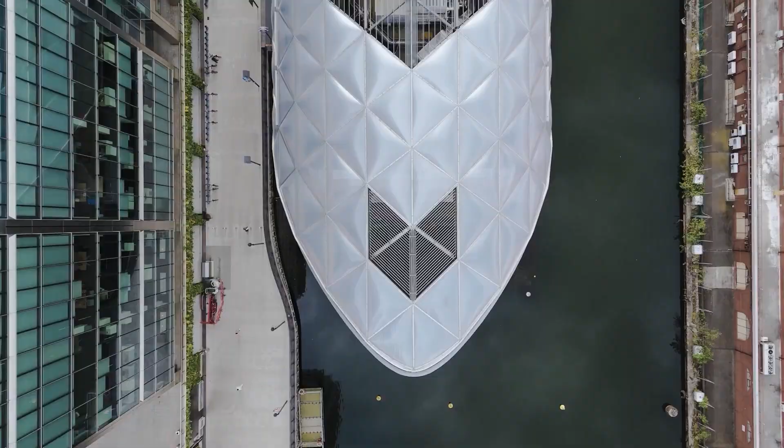Now, it's over budget and took much longer than planned. It will also only run 6 days a week. Back in May, the long-awaited and over-budget Elizabeth line opened.

That's terrible. Yeah, it's going to disrupt most of our commuting to and from London.

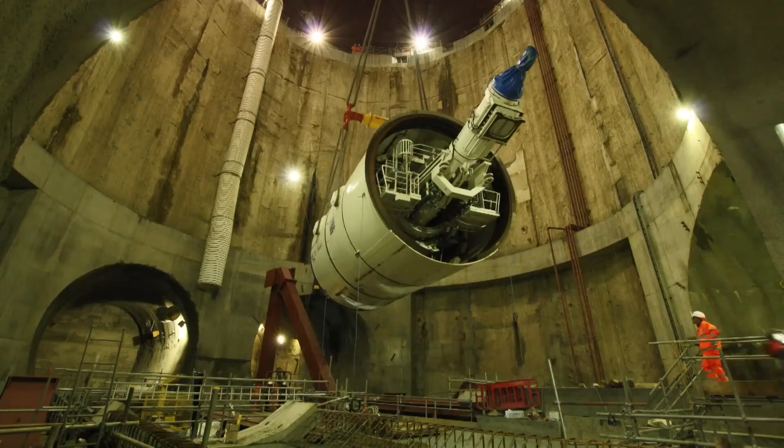The Elizabeth line was constructed using different advanced engineering techniques, including TBM, SCL, and segmented lining systems. Now a vital part of London's transport network, the Elizabeth line did not come into being without challenges. What began as an ambitious project to improve mobility for Londoners soon faced the harsh realities of building through a city shaped by centuries of growth.

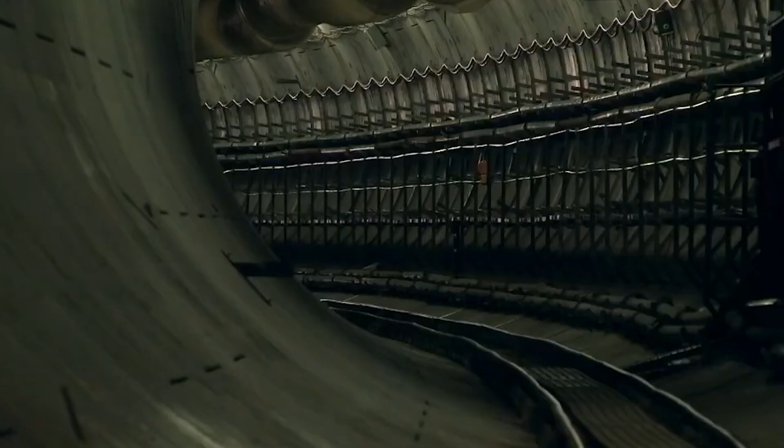Adding a new railway beneath one of the world's most congested underground and surface environments presented a host of complex obstacles. Today, we delve into the remarkable story behind its construction, uncovering the trials, breakthroughs, and critical moments that brought the Elizabeth line to life.

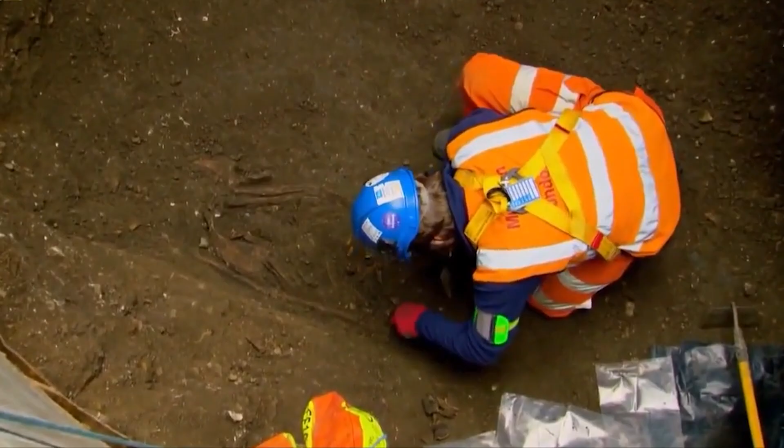A staggering 4-year delay. What exactly went wrong? The reasons are many, ranging from financial complications tied to contracts and executive salaries to unexpected incidents that arose during construction. First, the challenges of building in a dense urban environment.

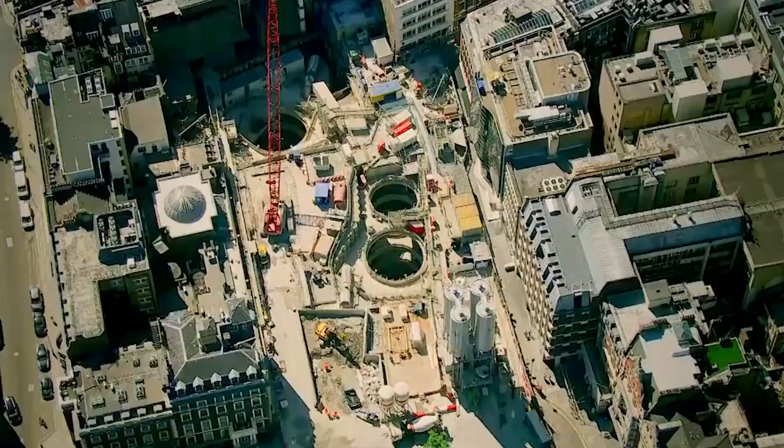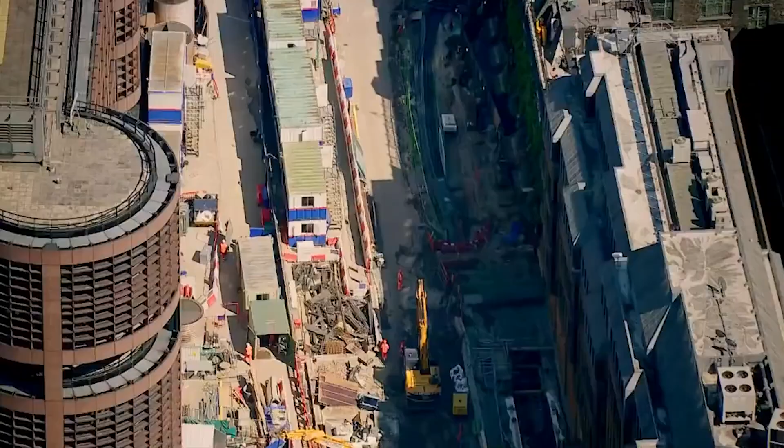Construction took place during the 2010s, a period when London had already reached a state of near saturation. Centuries of development had created a maze of infrastructure, existing underground lines, skyscrapers, sewage systems, all layered across both surface and subsurface. Navigating around these to safely carve out a new route proved to be a formidable task.

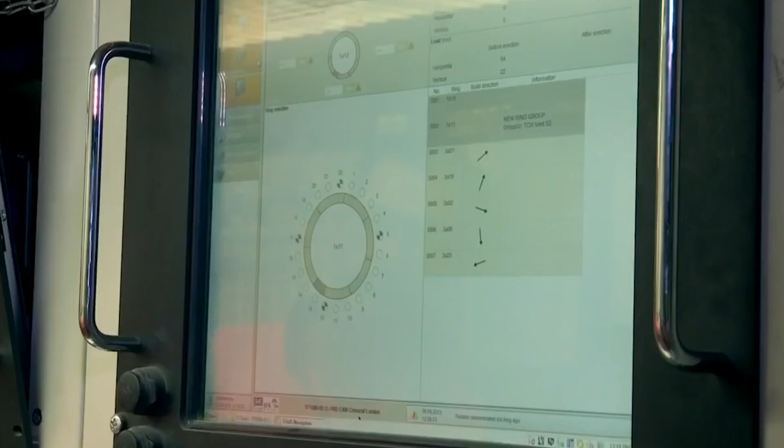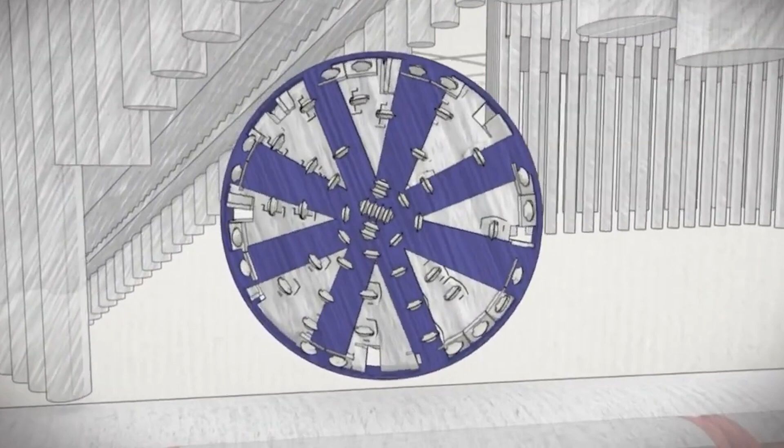TBM might seem like just a tool for digging, but in reality, it requires an incredibly precise path to be set. For instance, when digging near Tottenham Court Road Station, the TBM had to pass through a space just 35 cm away from the escalator's structural base. Additionally, it had to navigate only 85 cm away from an active tube line. In other words, the precision required was so high that it was as if the machine had to clear a path with the smallest of margins.

Structure. This is our TBM. Yep. This is the pile bottom. Wow, and that's what we got in between. It's unbelievable. That's how good we are.

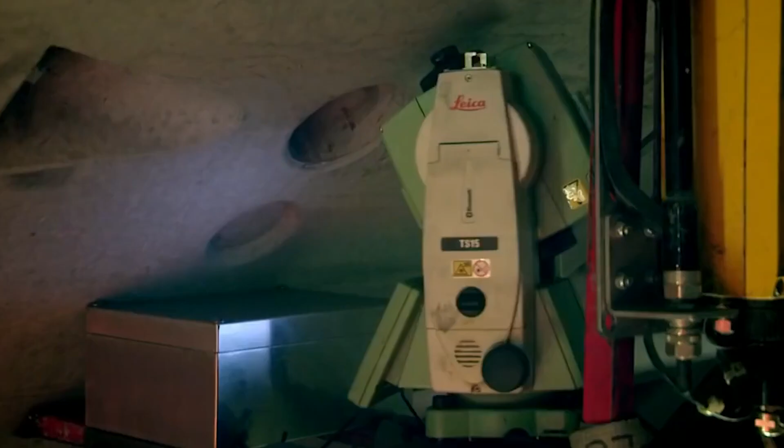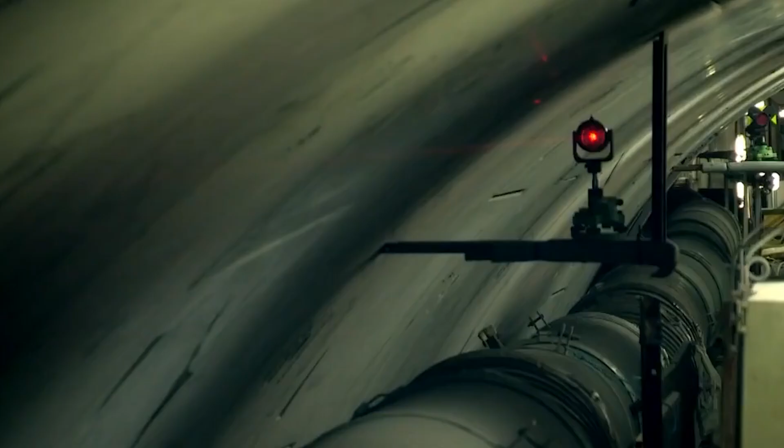Almost like threading a needle. In such tight spaces, the precise navigation of the TBM was made possible by the Tunis navigation system from VMT. Tunis is a highly accurate system capable of millimeter-level precision, continuously tracking the TBM's real-time position and correcting any deviations. Here is how it works.

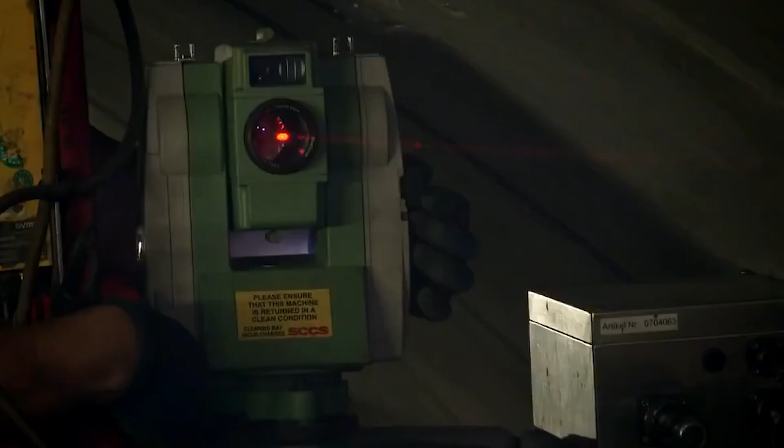A laser transmitter is set up near the tunnel's starting point. This transmitter sends a laser beam along a pre-designed reference line, guiding the TBM along its intended path. Inside the TBM, a target unit is installed to detect the laser beam emitted by the transmitter. This information is then continuously tracked by a total station, a precise measurement device which calculates the TBM's current position and direction.

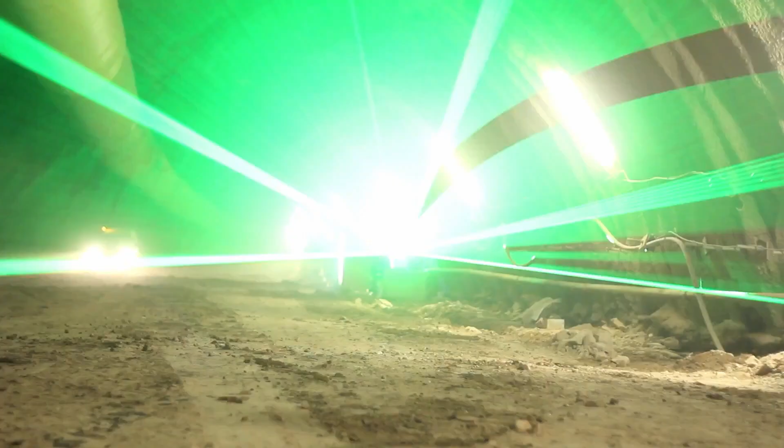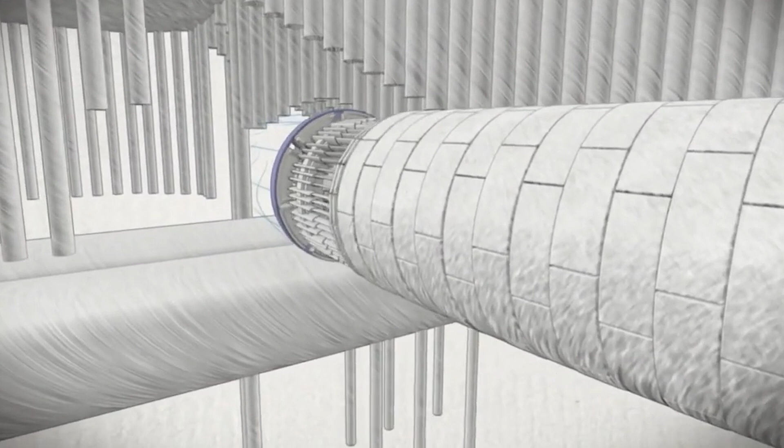In curved sections, relying solely on the laser transmitter becomes challenging for maintaining accuracy. To compensate, additional devices like reflectors and gyro sensors are used to correct the path. All of these processes are integrated into the Tunis software, enabling the TBM operator to make real-time adjustments to the machine's direction. As a result, thanks to the Tunis system, the TBM was able to safely complete its journey along the predetermined path, even through the complex and sensitive underground spaces of the city, without any collisions.

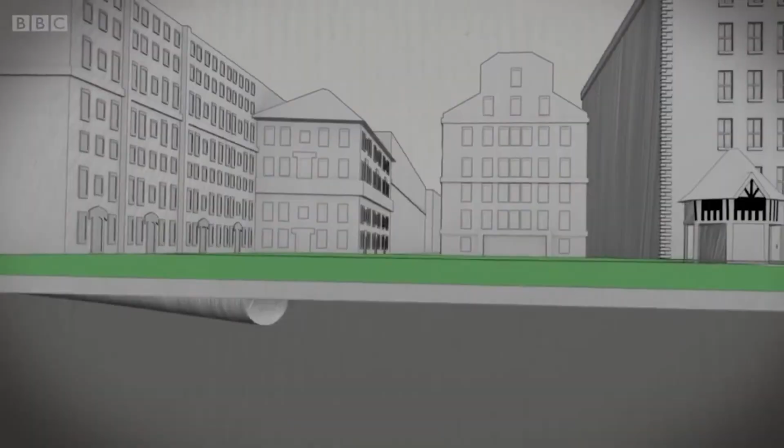This ensured that there were no incidents such as debris pouring out from beneath the TBM, which could have caused panic among passengers. Secondly, the ground subsidence problem occurred during the tunnel excavation process, which affected the stability of the surrounding buildings. Around 21 kilometers of underground tunnels were constructed for the Elizabeth line, cutting through the heart of central London. Given the dense concentration of buildings above ground, managing the risk of ground subsidence became a critical concern.

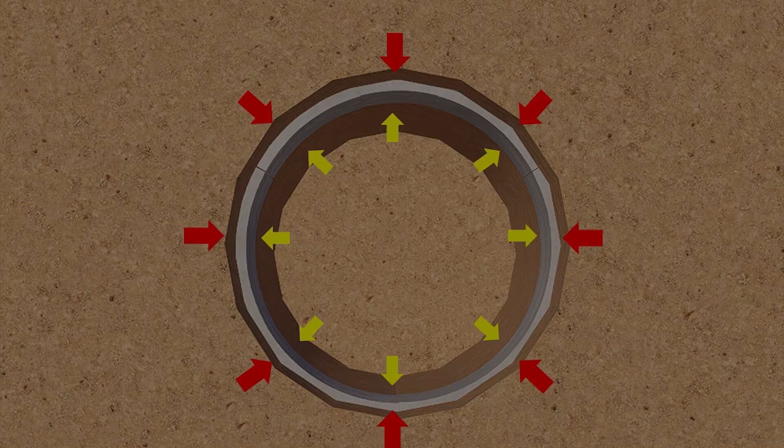When tunneling takes place, the surrounding ground loses its equilibrium, leading to ground deformation. In the case of TBM, the pressure at the tunnel face and the tunnel lining help support the ground, somewhat mitigating this deformation. However, in soft ground like London clay, it is impossible to avoid ground movement entirely, unlike in rock formations. This occurs because the removal of underground soil or rock causes the surroundings to lose their previous support, leading to deformation ahead of the excavation phase.

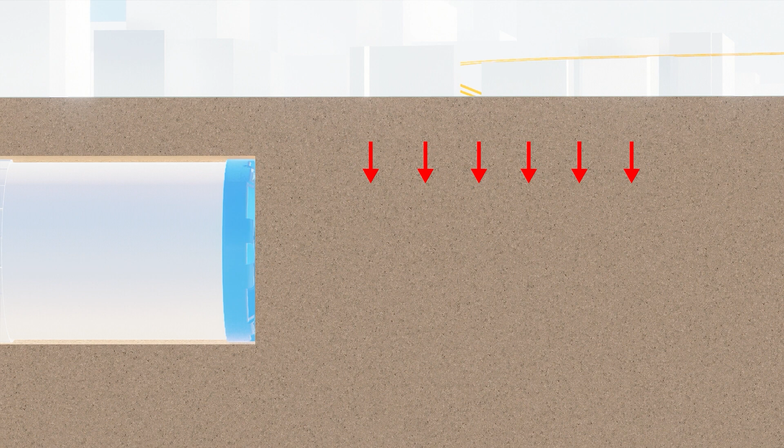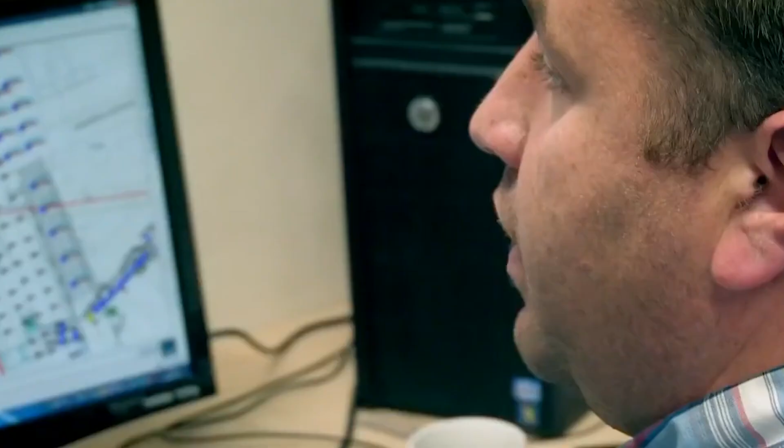Additionally, there is always a time gap between excavation and lining installation, during which further ground movement can take place. When subsidence occurs, there is a risk of damage to the buildings above. To mitigate this risk, extensive building damage assessments and monitoring were carried out.

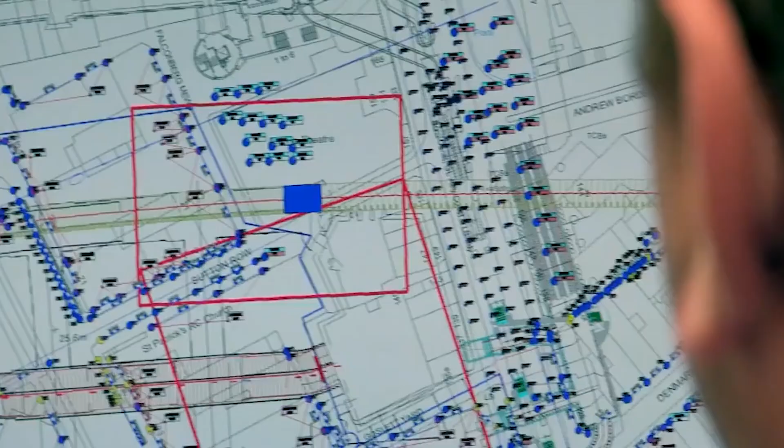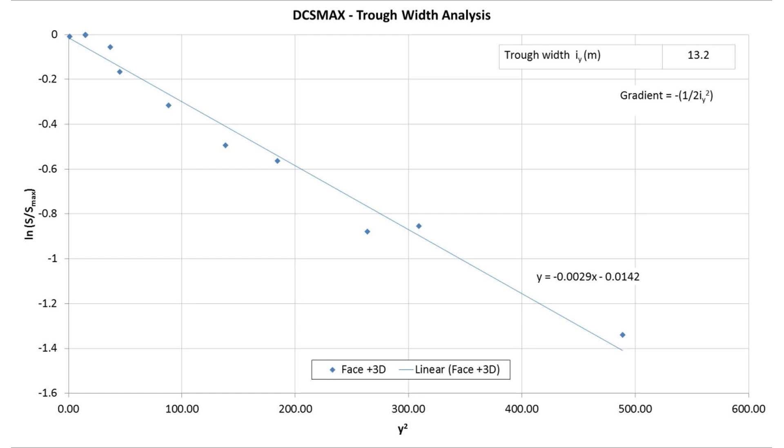Overall, the tunnel sections experienced minimal ground movement and the impact on buildings was negligible. This was consistent with the actual recorded results during construction. Especially in the western section between Paddington and Farringdon, which passes through the London clay, the volume loss was less than 0.5%, below the conservative damage threshold of 1%.

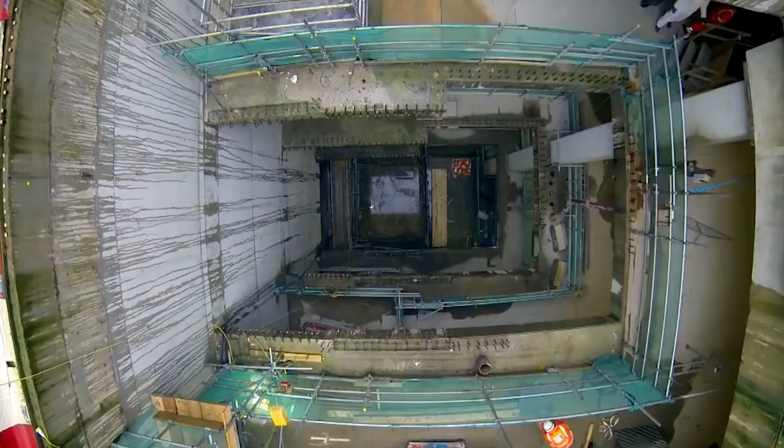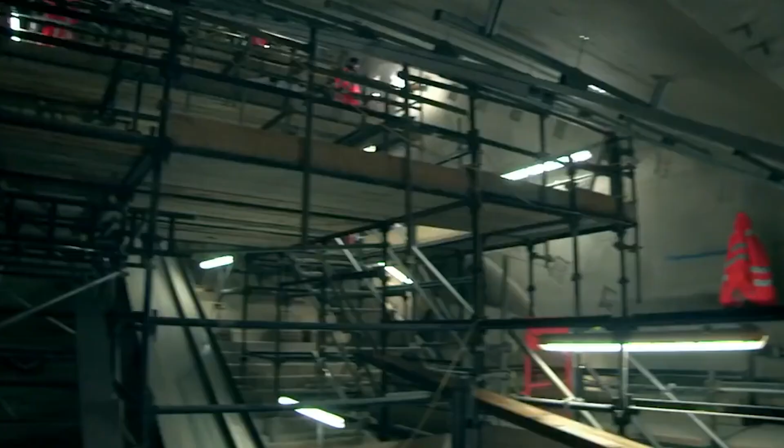However, there were some exceptional cases. Areas around stations in particular required deeper excavations, and horizontal deformation was more significant. Tottenham Court Road, for example, had many existing underground structures such as the London Underground lines, sewage systems, and communication cables. With the high density of buildings above ground, the tunnel had to navigate carefully around these structures, leading to a winding path for the Crossrail tunnel.

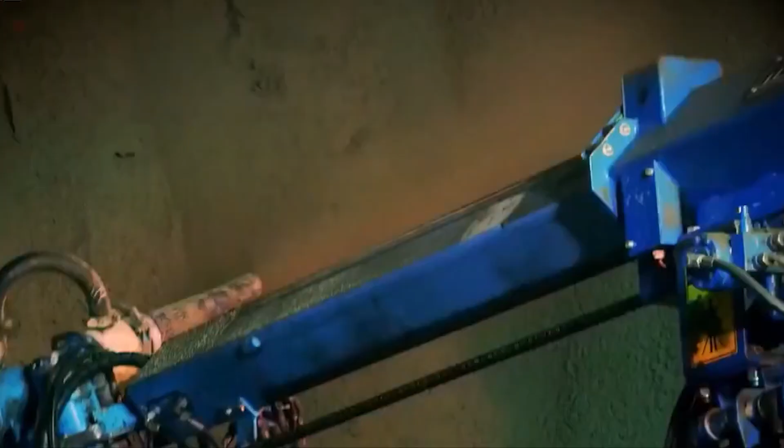As a result, the SCL method, which is more suited to curved sections, had to be used. This method involves spraying shotcrete as the space is excavated, but it results in relatively larger ground subsidence. In contrast, Canary Wharf offered more ample space and a simpler structure, making it suitable for the use of TBM.

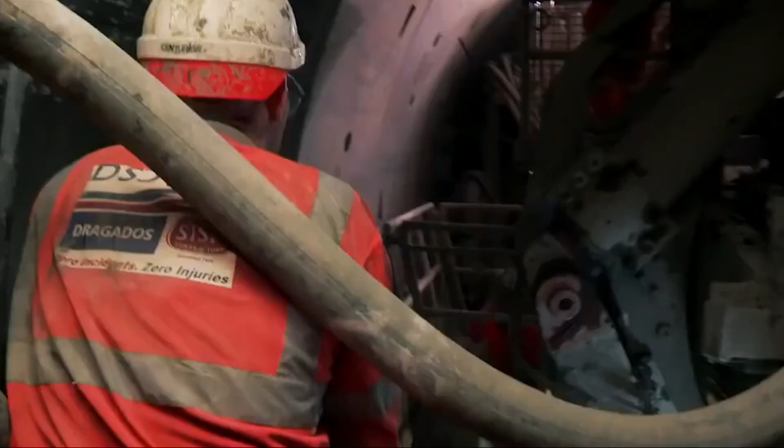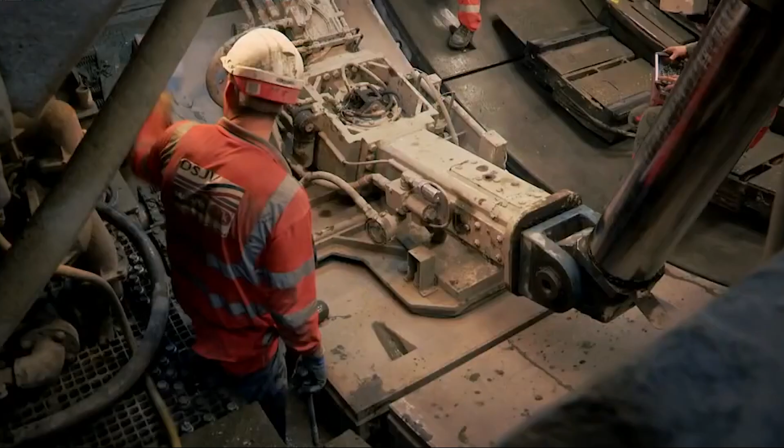It works by excavating the ground at the front while simultaneously assembling concrete segments at the rear to form the wall lining. It even applies face pressure at the excavation phase to prevent the ground from collapsing right from the moment of excavation. In other words, with a TBM, excavation, support, and wall lining happen almost simultaneously, leaving little room for the ground to loosen.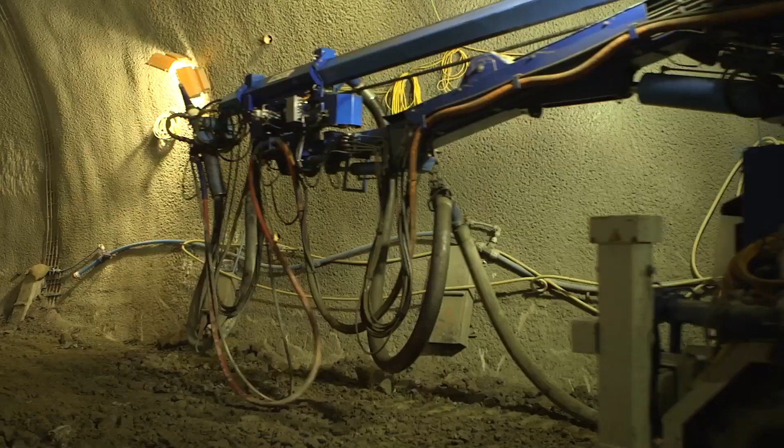In summary, the ground subsidence in the Tottenham Court Road area, where the SCL method was primarily used, was relatively significant. This was especially true around areas like Tottenham Court Road Station, where there is a high concentration of historically valuable buildings, making them a focus for meticulous monitoring. The Crossrail project implemented a 3-step building damage assessment to predict the risk of subsidence for each building and to develop measures for those buildings that were likely to be affected.

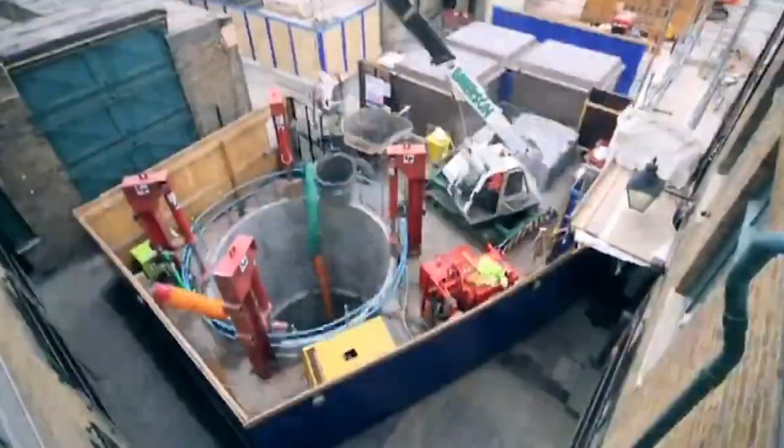The measures taken included compensation grouting, where TAM injection pipes were installed underground to inject grout at high pressure, encouraging ground uplift and compensating for subsidence. Additionally, reinforcement structures were installed and buildings with defects were pre-repaired. To monitor ground and building displacement, observation equipment with a traffic light system was set up, allowing for real-time risk management.

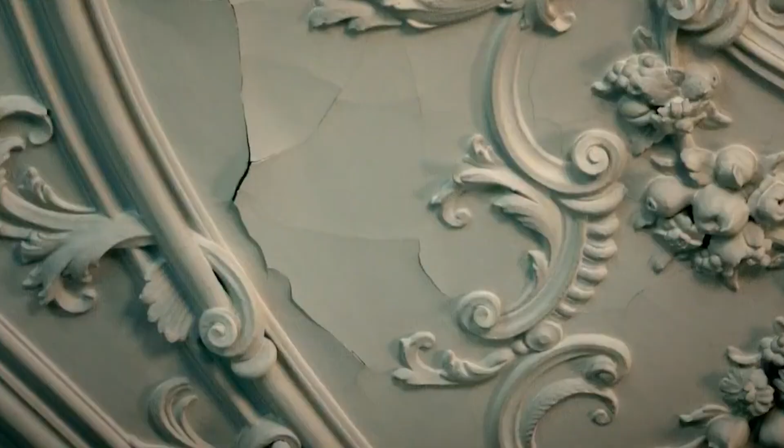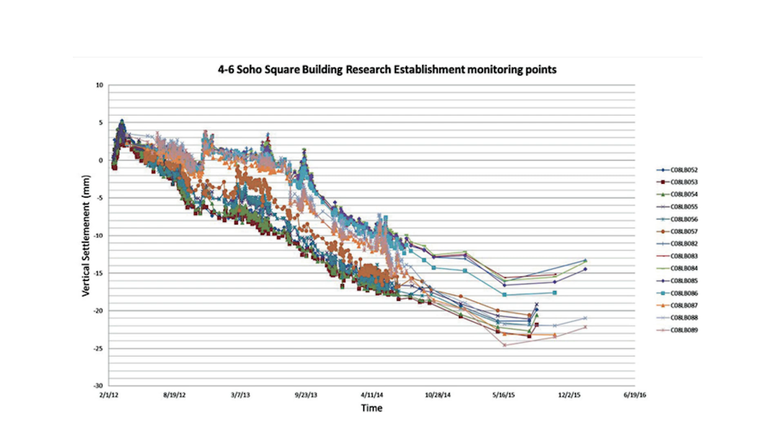Despite these measures, there were instances of cracking. In those cases, immediate action was taken through crack repairs and enhanced monitoring to track the condition and prevent further damage. An additional challenge was the issue of noise and vibration caused by the tunnel construction. During the construction of the Elizabeth line, numerous complaints arose from residential areas due to the noise and vibration, necessitating the implementation of measures to address these concerns.

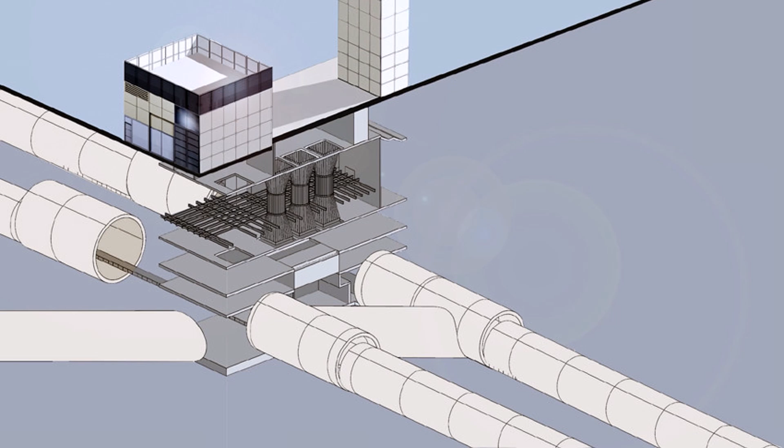In fact, the Hanbury Street Tunnel was delayed due to noise and vibration problems, which eventually led to a permanent suspension of construction. Due to the installation of tunnel vents and emergency exits, the construction was halted and soundproof walls and noise-absorbing panels were installed because of residents' resistance from excavation noise as they collided with dense dwellings. Nevertheless, it was not completed in the end due to persistent resistance from residents, adding to problems in local commercial districts. As efforts were made to avoid clashes with existing underground lines, perform construction with minimal space, and address noise and vibration issues, the project inevitably proceeded more slowly.

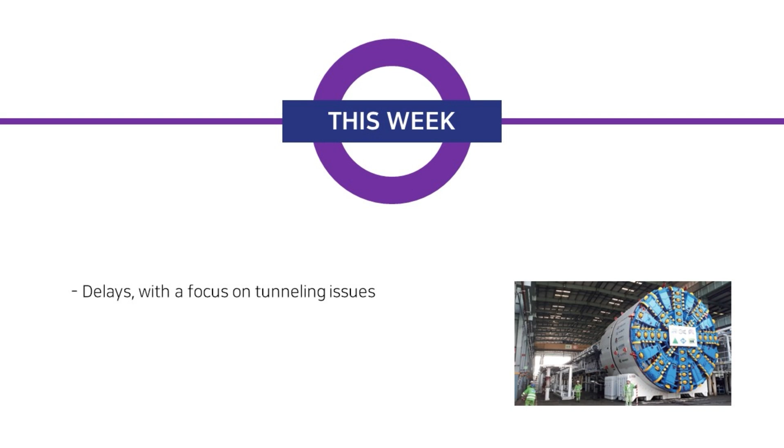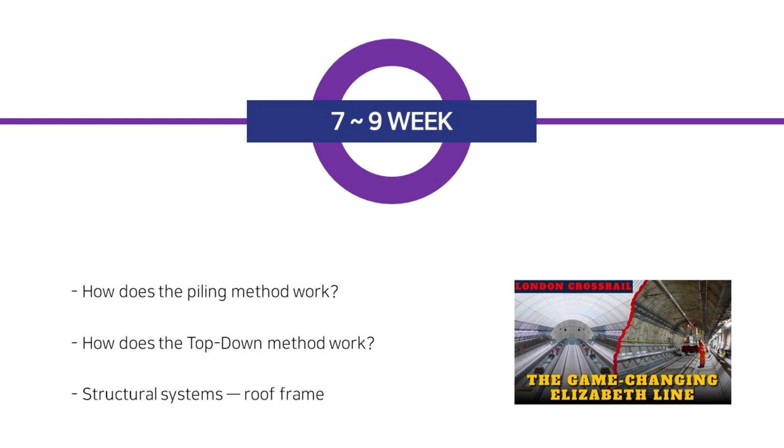This week, we covered the delays that occurred during the tunneling process. In addition to this, there were many other issues that arose during the construction phase. So, next week, we will explain the contract and signaling systems as well as the financial challenges and how they were resolved. In weeks 7 to 9, we will discuss the construction methods and structural systems used in building the Canary Wharf station, including its roof and garden. Finally, in weeks 10 and 11, we will wrap up the presentation series by sharing the overall story of the selected building.